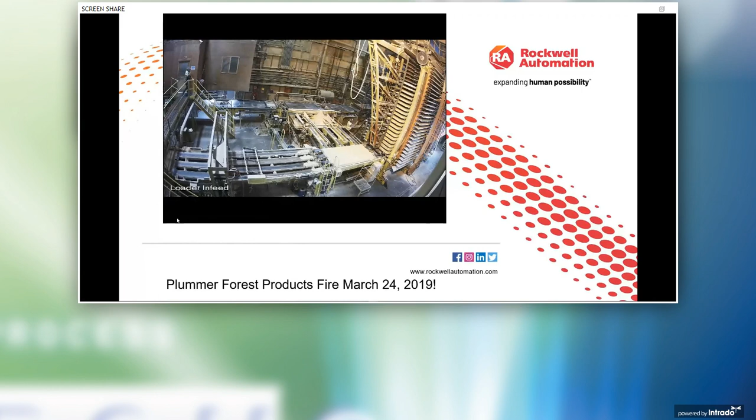Here we have folks who've determined that there's something wrong above the press. What ultimately happened was a bearing failed on an exhaust fan above the press, dropped hot sparks on top of the press, which generated some smaller explosions that turned into much larger explosions, as you'll see as the video goes on. You can see the reaction of the people nearby and how devastating it actually turns out to be here shortly as this moves on.

You can turn it on, guys.

A few people escaped about this time, didn't they, Robert, when the fire got so bad? Everybody started to evacuate the building at this point. It was pretty fast, and it was amazingly quick how fast the fire expanded.

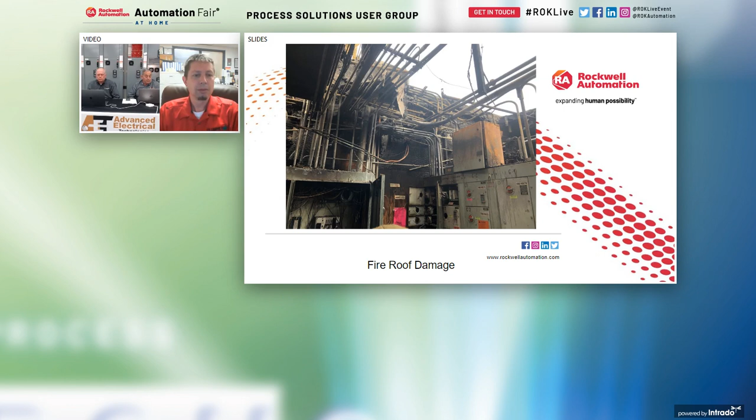Part of the criteria of this job was to keep the operator consoles as they were, to lessen the effects of the fire on the operators and keep them more familiar with the consoles. So we actually salvaged the consoles with the water in them, repainted them, and rebuilt them with new push buttons to make them function exactly as they were under the new PlantPAx system.

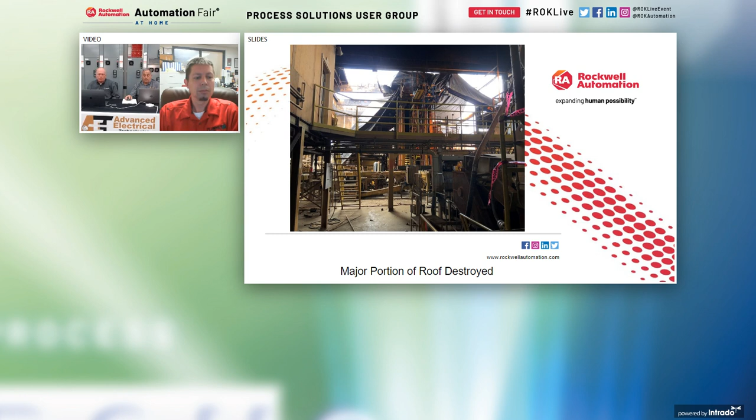Go ahead, Robert. So these are some stills of the after effects of the fire, and I think the significant thing on this one is that it burned through the roof. So you have all the problems Robert described, plus open to the weather. We ended up using tarps to try to mitigate that. Thankfully the weather wasn't too bad, but there were definitely some rainstorms they had to deal with.

I keep this shot in mind because we're going to show what it looks like now and what it looked like within 3 months of rebuilding and getting everything going. Do note that the I-beams at the top are massive and they're all charred, so it was massive structural damage.

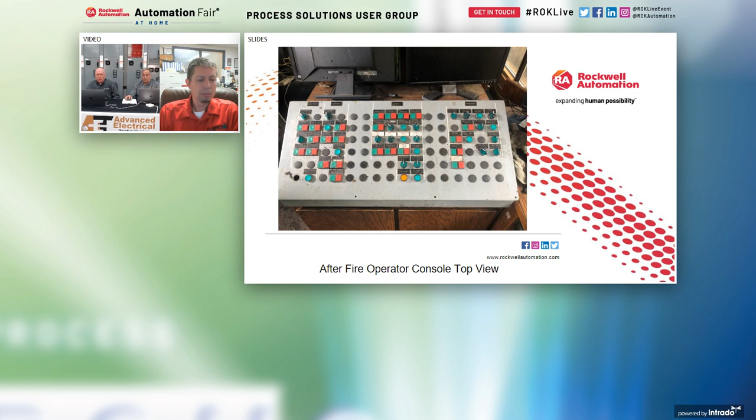This is the control panel that is in the operator area, and the significant point here is the water damage was worse than the fire damage. Here's another shot to show the tarps and the whole problem that we had to deal with.

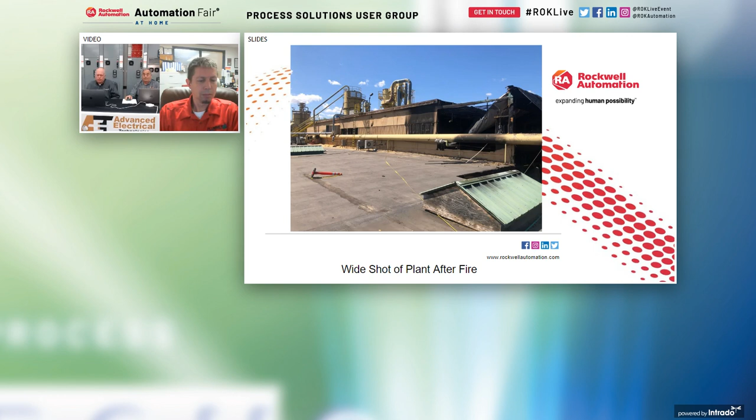I think it's helpful to look at this from the outside to see the end of the process, viewed from the outside of the building. So you can see it was really substantial.

One of the points I'd like to make at this time is that the plant was completely down, and the owner was paying all the employees in some manner to stay at the mill. So he had his whole production crew doing something during this reconstruction, and it was imperative that we get the plant back up and running. He was also purchasing product from other companies to supply his partners and customers, so the pressure was on to get this job done in the time we had.

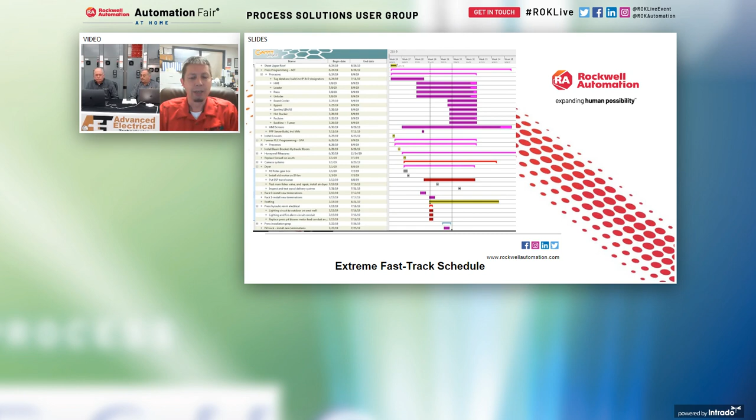Thank you, that's very helpful.

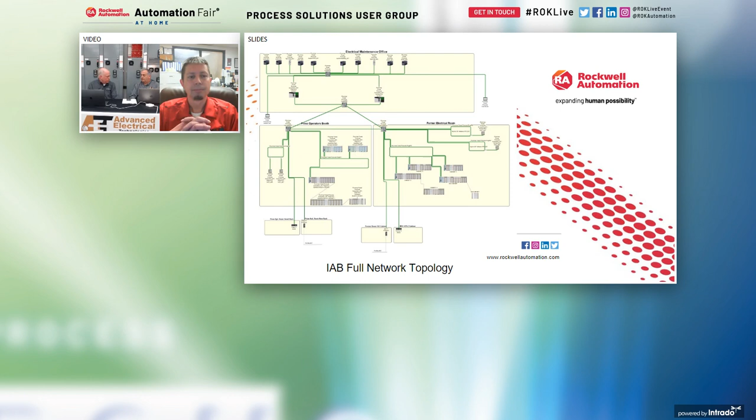This is a top view of the IAB file we created right out of the get-go, and that's just one of several tools we leveraged to get going as fast as possible - Integrated Architecture Builder, for those not familiar with the PlantPAx tools. We all three were working with that. Adam created it initially, and I think everybody used it, which included the hardware purchases and integration with existing systems. It was huge for us, a very valuable tool.

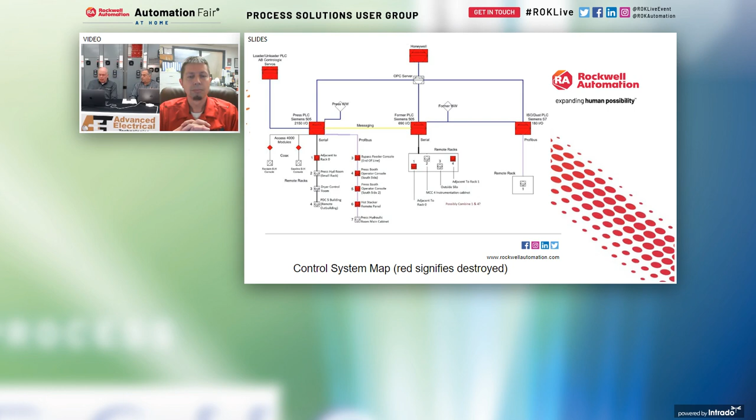This is our own drawing, and the red indicates items we had to replace. A very important point here is we wanted to minimize the need for field wiring, because if there was existing field wiring with legacy systems, we wanted to leverage those. So we only replaced those things which were fire damaged, with the plan to replace the other non-Rockwell products over time. But given the schedule, we kept as much in place as we could. I think Robert's working on that right now. Yeah, that's right, moving forward.

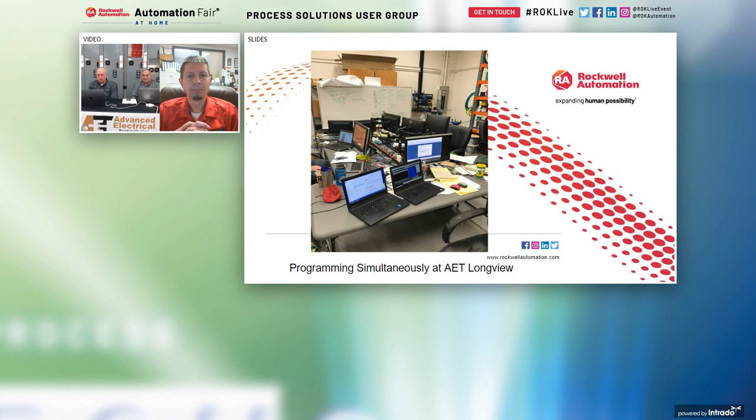This is actually the room we're in right now at AET. Back in the day, that was our Scrum whiteboard, and we had all these notes up. Everybody was all hands on deck. Robert actually left from Post Falls and lived in the Longview area for 6 weeks or more, and every day we were all sitting here working. It was a mess - it was an organized mess.

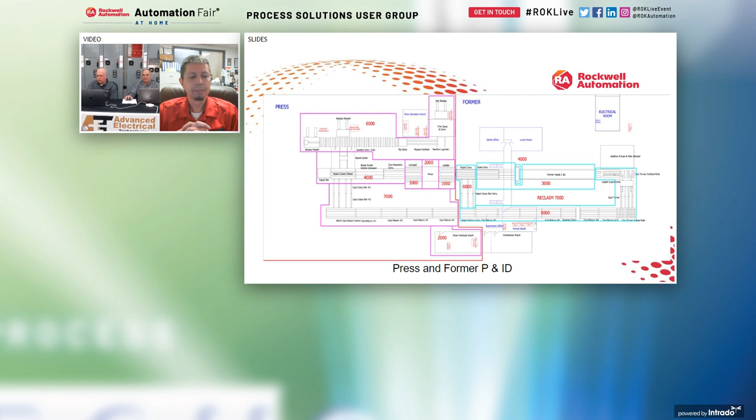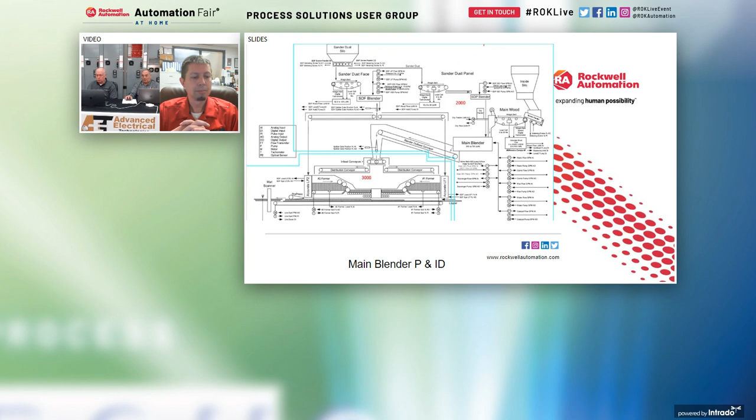So there are a couple of the P&ID drawings. These are kind of a plant overview from one line, and we'll be looking at the actual process running later. I don't know if we need to give a detailed description of how the process works at this point, but you'll see it in a later video.

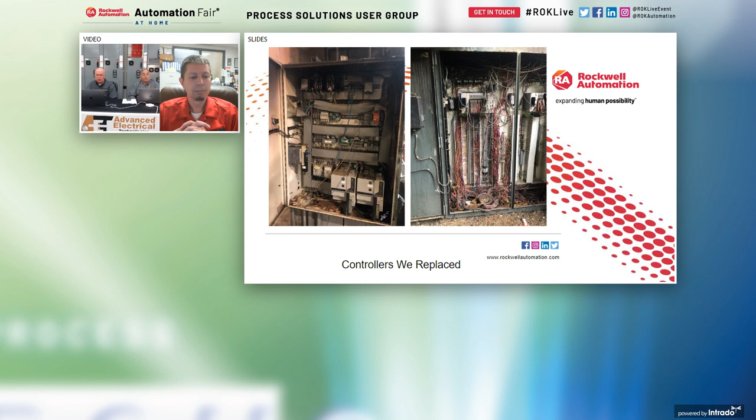So this is a still of that one shot that we saw earlier. You can see how much damage there was. So the electrical and the panel work was really critical in terms of the project execution.

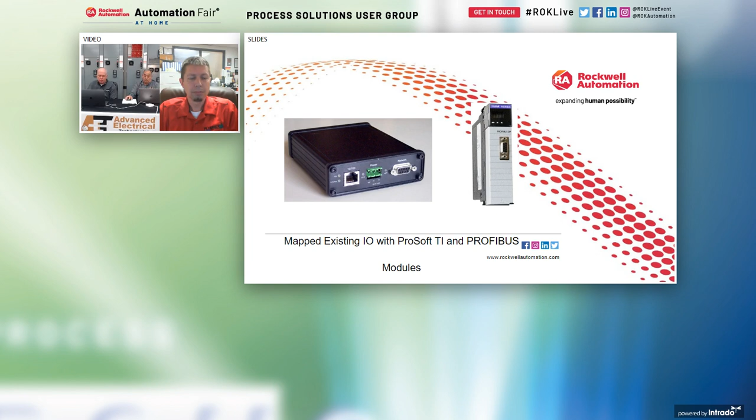A main thing to say here is we used the Encompass partner Profibus modules to talk to the existing TI and Siemens IO, and we had to coordinate that very tightly. We didn't feel we had the time luxury to rip and replace all of that legacy stuff that still worked. It wasn't burned.

And we leveraged the 1492 IFMs heavily because we were on such a screaming fast schedule that we needed to, this helped us a lot. I mean, Adam, if you want to talk to that point, this is something important to the panels.

Well, the IFMs obviously helped us wire the cabinets in a very fast way, and they're very organized. So we had multiple PLC cabinets that we had to put together and ship within weeks, and we were able to produce those panels in a very timely manner with the help of the IFM modules.

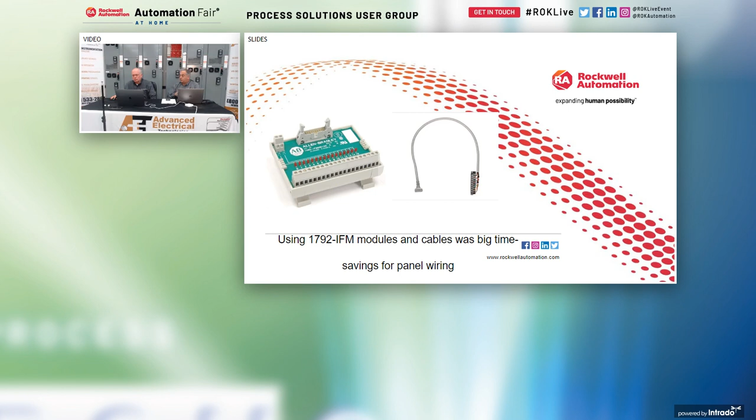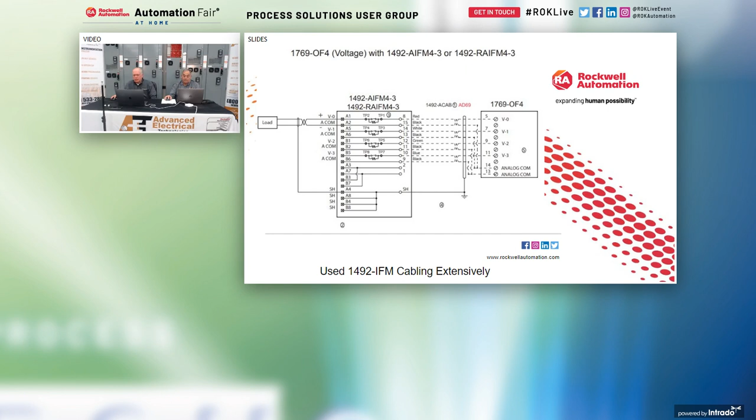And this is a representative wiring diagram of an IFM for those who are not necessarily familiar with them. So it's already pre-done, and the cables just had to be cut to length and then landed, so that was a big help. But one of the things that was really critical is the coordination of everybody on the mapping of the I/O.

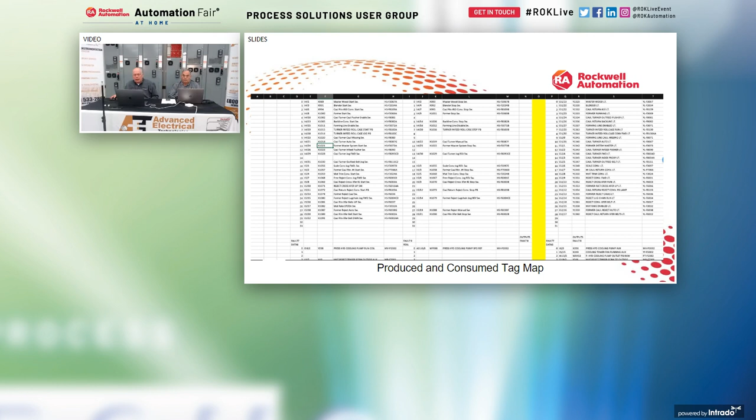And so what we would do, and then Robert was involved on every point as we were going through it, both in the programming, the HMI, and then ultimately the field wiring all had to be wrung out. The significance of this slide is it represents many places in the spreadsheets that we generated that were red, representing things that had to be changed.

And it was really important that all three entities, Robert as the customer, and APT and GPA, were on the absolute same sheet of music as we proceeded, especially with mapping to the existing Siemens and Texas Instruments.

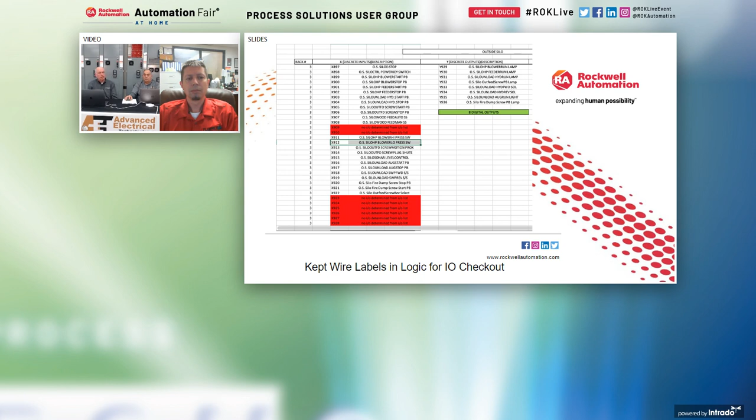This represents a script that was in the Wonderware HMI that we converted to View, and that script was something that we felt was better done in logic. So we created four blocks of logic that enabled all of the relevant I/O in one sweep.

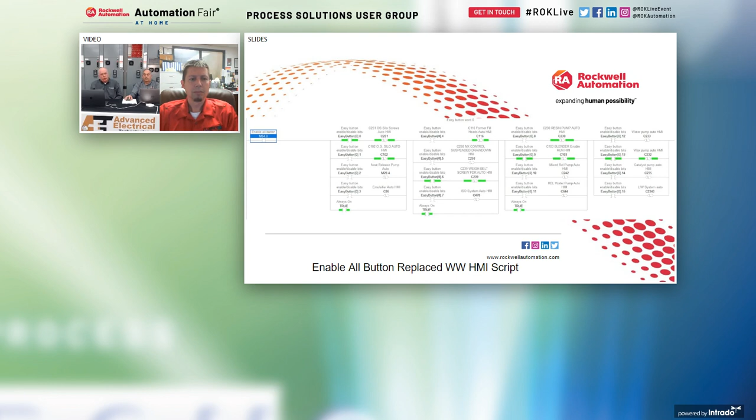And then we could do with it as we wish. So this is a representative of the logic that replaced that HMI script from Wonderware.

Now this shows just another example of some of the tools that were used within PlantPAx and programming. We used, of course, add-on instructions. We used library process objects and those kinds of things. I don't know if you, Adam or Robert, want to talk to this, but that was a really important piece to how we got this done.

Well, I think that's some of the benefits of using PlantPAx, the add-on instructions and the faceplates that come along with it, that aided us in making a common feel and look throughout the whole system.

How about you, Robert? Yes, it enabled us to essentially do a lot of copy and pasting and run right down through a lot of I/O and all the motor structure. It sped things up very, very fast after we basically got one thing going. It went much faster after we got one thing lined out.

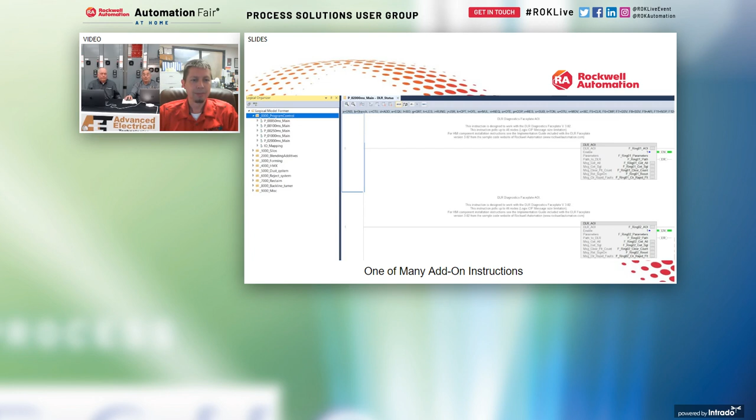Yeah, and I think we probably found a few hidden things in that project, and being able to utilize these tools, it wasn't such a big crisis when you find those missing motors or missing items.

So here are some more representative shots of some of the tools that we leveraged, including the conversion tool from Wonderware to View. And a very important part of this was, and this was mandated by not just Robert but the whole customer, that they wanted the look and feel for the operators to be just exactly as close as possible to what they were used to.

So we didn't try to do ISA-101, grayscale, anything. We went straight with what the graphics were before. There just wasn't time to get the operators up to speed at the pace we tried.

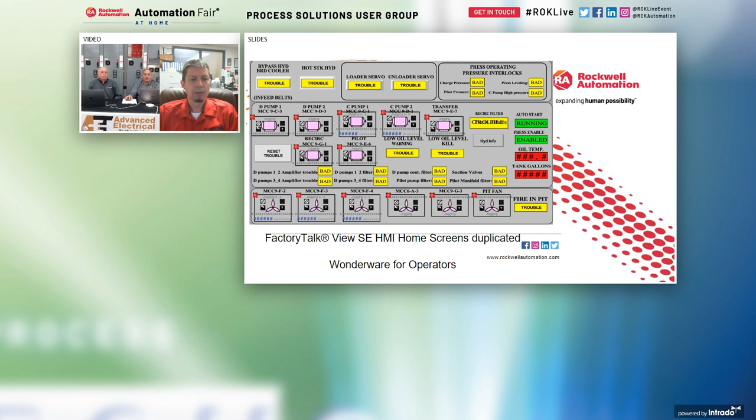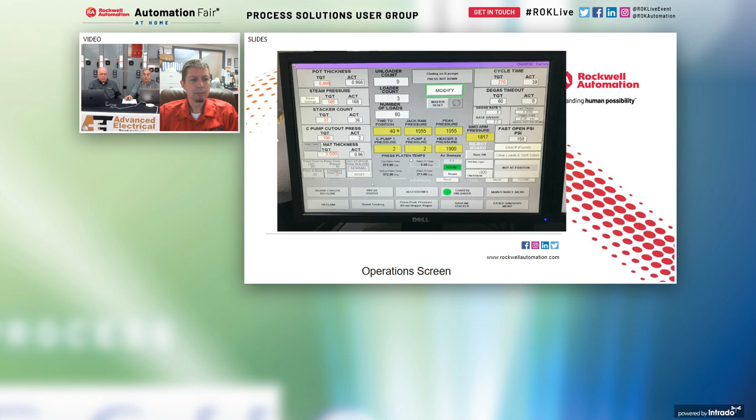So these are some more, actually these were taken a few weeks ago, so this is a year after they've been running, and Robert sent me these pictures. You can see some of the HMI graphics on View that we leveraged, the faceplates and so forth. Again, more of the same.

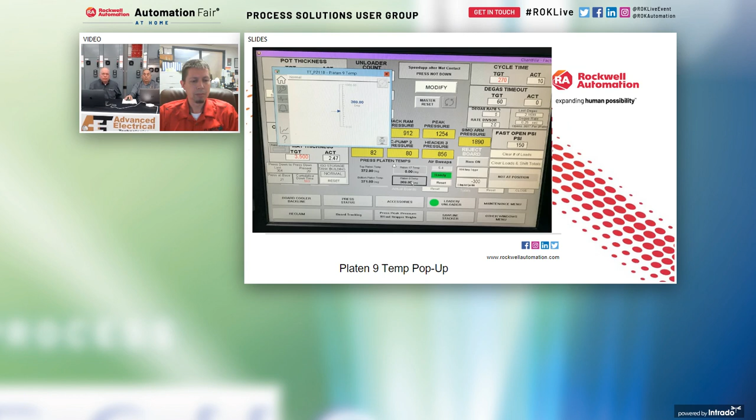You want to talk to any of this, Robert, in terms of how it helped in the operations? Yes, trying to make it as original to the operators was very critical.

They had very little education time when we started back up. It was very familiar to them. They were able to go to the screens they originally went to, and they looked very familiar, so navigation was great for them. It sped up the whole startup process.

Operators could actually give feedback and say, oh, this doesn't work like it used to, it should have worked like this, and the minor changes could be made. Huge impact, huge impact. Now, the third batch was able to be sold, wasn't it?

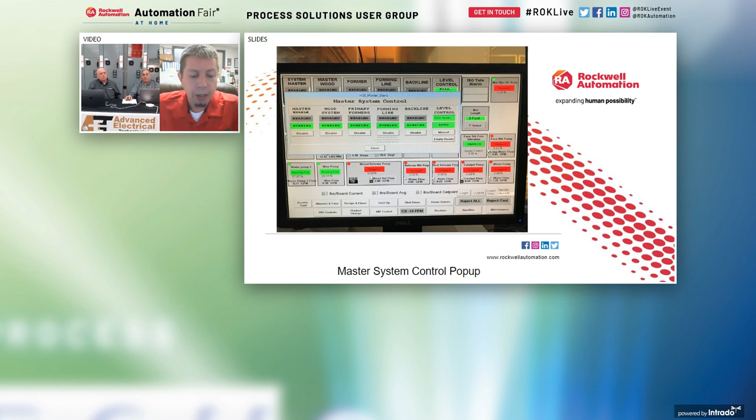I mean, the third run through this, or is that wrong? Okay, the third press load that came out of the press was on-grade product, sellable product, after we started the plant back up. That was also because of navigation in the HMI system and all that. The operators were very familiar with the process and able to start it up and navigate through it quite fast.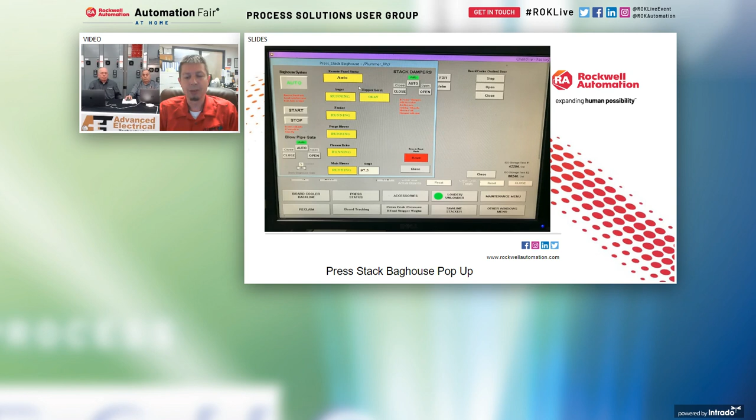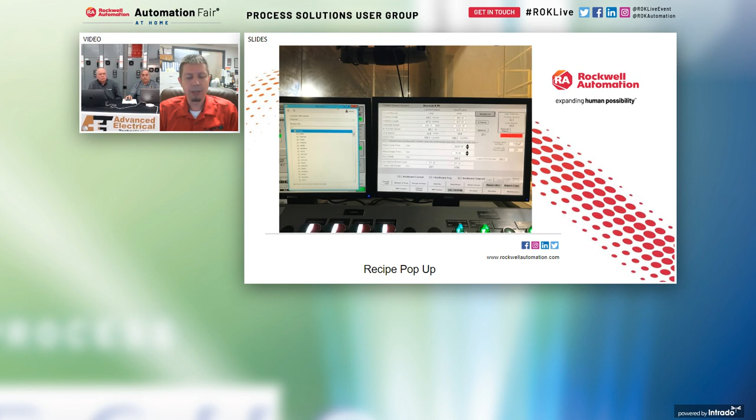And the significance here is these are recipes, right? I'm looking at a distance, isn't that what that is? Yeah, it's pop-up recipes. So you want to talk to that a little bit, Robert? Yeah, so the old system had recipes dealt with through the Honeywell MeasureX system. We wanted to pull that into the process, the PLC system, so we used Recipe Pro for that.

And then here you have some actual press cycle, showing you the position of the press, some of the trending of that.

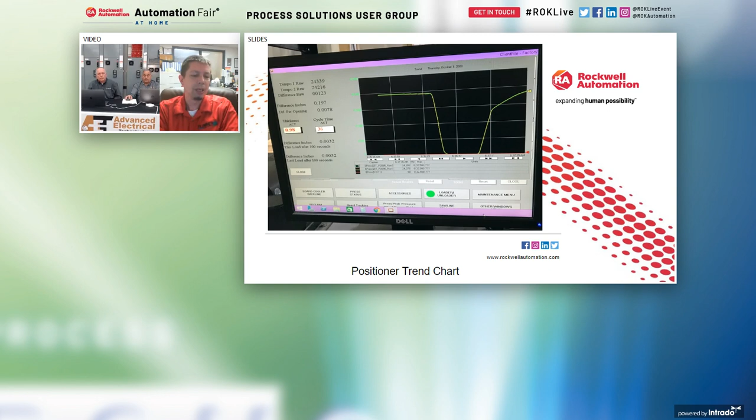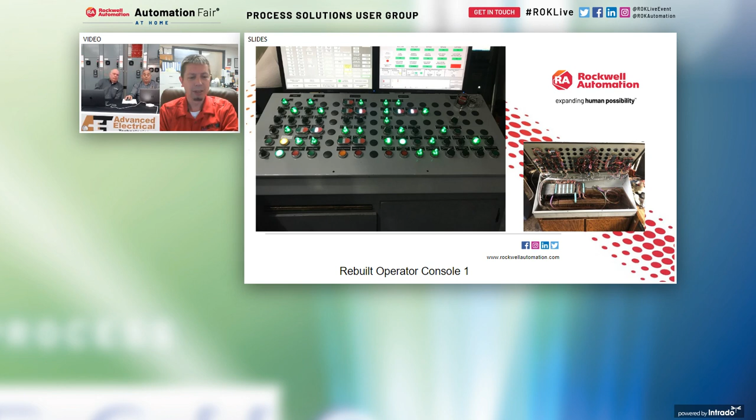I believe the next, here we go. Now, what's interesting about this is you saw images earlier in the fire. Here is the station after it's rebuilt, how clean it looks. You can see the consoles are exactly the way they were before. Worked out quite well. More of the consoles before and after, which is amazing. Yeah, they looked identical, so it was very easy for the operators to pick up on that and go right back to work.

So Robert's going to talk through this area.

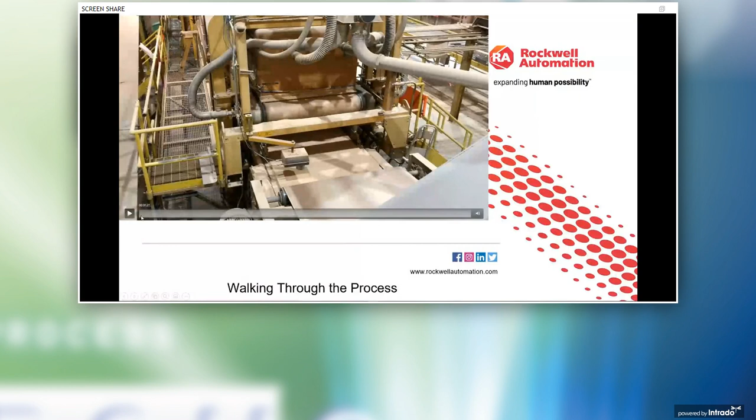Here's a little rundown of the process. Right here we have the forming line. In the lower part of the picture, the mat is coming out of the former, and you'll see it travel by. Now there are single sheets, and they're being loaded into the loader. 25 of those will load into the loader at one time.

As the load gets full, that load will be pushed into the press as another load is being pulled out that's been pressed. We'll move down here towards the loader, and you can see this loading action a little closer. And then the press itself.

The press is currently up in the air, just about to finish a press load.

As we move down here, you'll see that the unloading process is happening at the same time as a continuous process. Right here, the mat is actually separated from the caul plate. So there's your finished board separating from the caul plate as it comes out of the unloader. 25 at a time, one piece at a time. Continuous process.

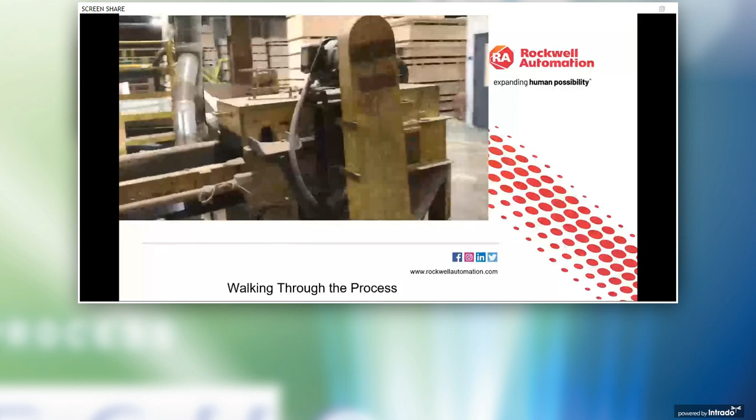You can see it's quite an extensive process that we were able to get back up and running, including motion. I mean, there's motion, there's servo drives, there's all kinds of different items that we had to program back in, and utilizing the PlantPAx system helped speed that process and get this back up and running, because there's a million different things going on.

I think we ended up somewhere in 2,500 to 3,000 points of I/O. I think you're right, a lot of I/O.

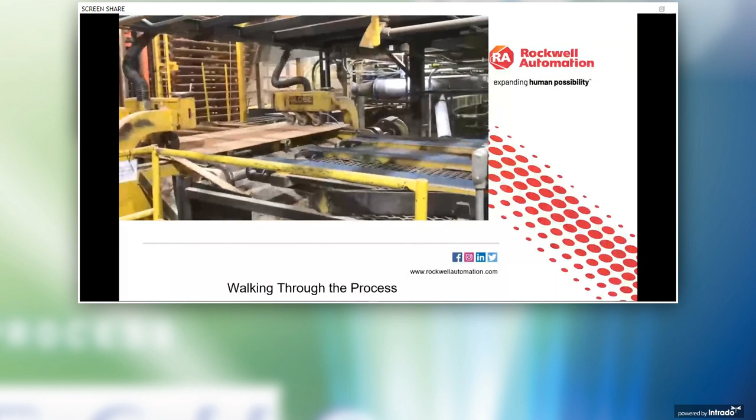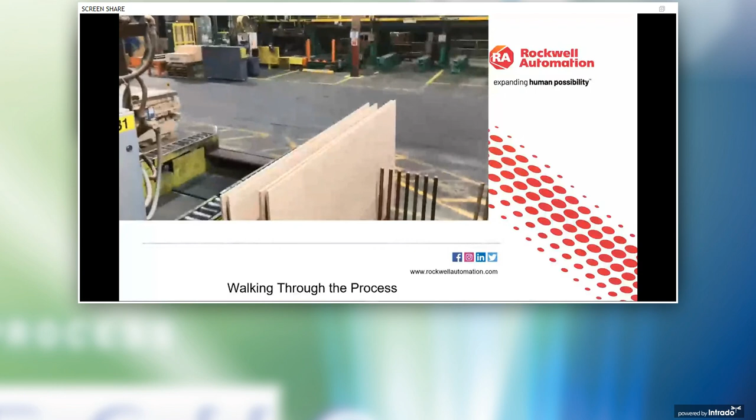So just a point of reference, this was all the hulk that was burned out that you saw about 20 minutes ago. This is with the open ceilings and the burnt I-beams and the water everywhere. Yeah, this was the former, right? That was more damaged by water than by fire. Correct. Yes, there was water damage throughout everything seen in this video.

You can see the caul plates returning on the back line there. It's a completely continuous process, constantly running in a circle.

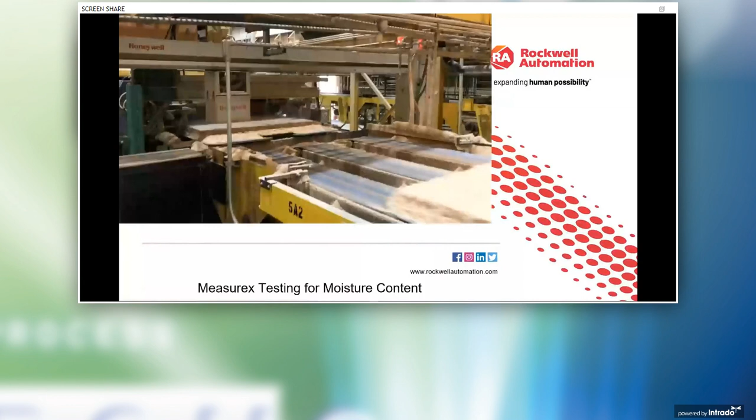So talk a little bit about how much volume you put out this last year, percentage over the previous year, how much downtime at 24/7. We took off running in September 2019, basically with one shift, working up to multiple shifts running 24/7 by November. So September, October, November, we were running the plant at full capacity, 24/7, back to normal.

Here in this video, we have the actual Honeywell scanning system, a nuclear source system that's taking weight measurements of the mats as they cross through.

So the weight is actually derived from the Honeywell, right? So instead of using a scale, you're using the Honeywell to figure out what the weight is. Yes, by formula. This system actually was not put in place until many months after the plant started back up, due to it being built in China and shipped to the United States, and there was quite a process to do that with the nuclear source.

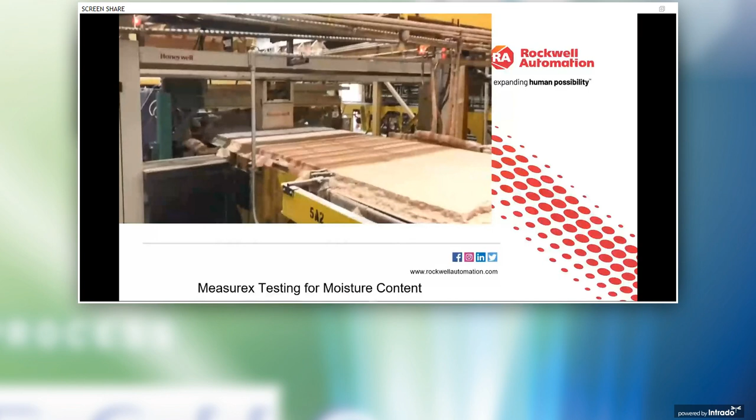Okay, you want to talk us through this? It's our last video, tell us. So here is a press cycle, we're going to actually see this thing open up. There's a 3,000 gallon hydraulic unit that operates this press. The press produces 1,625 tons, about 600 pounds per square inch. You'll see a load being pulled out.

And now a load will be pulled. Robert, one thing I found on the press was the fact that you're using Rockwell drives to control the speed of the closing by operating the pumps at different speeds, and that was new to me in this process. Yes, there's two PowerFlex 700S drives mastered and slaved together. That was amazing, those weren't damaged in the fire, correct? Correct, but we incorporated them in the new PlantPAx system.

I think that is the last one. So this is our last slide, and I'm glad for an opportunity to just say how amazing the experience was. It was great working together with everybody. It was a great team effort, we used the tools, we leveraged everything we could think of to get it done. Three months from fire to product was just crazy, and I think everybody played a huge part in that.